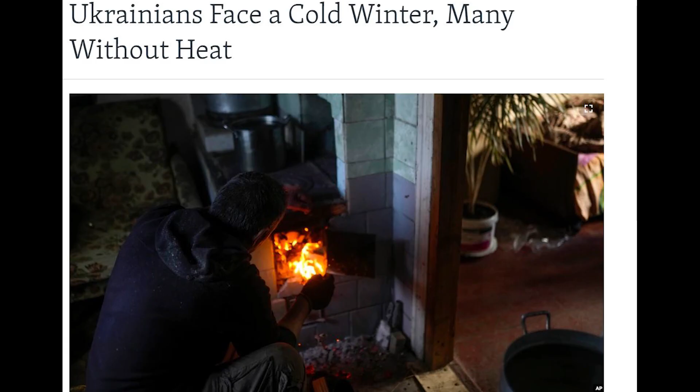Europe has a massive problem right now, and the problem isn't limited just to this massive plebeian right here. The problem is also this. Between Russia's war with Ukraine, somebody sabotaging Nord Stream, economic sanctions to Russia, and Russia cucking Europe by cutting off energy and gas exports, 2021 seems like a holiday in the Caribbean with Emma Watson for a stepsister compared to

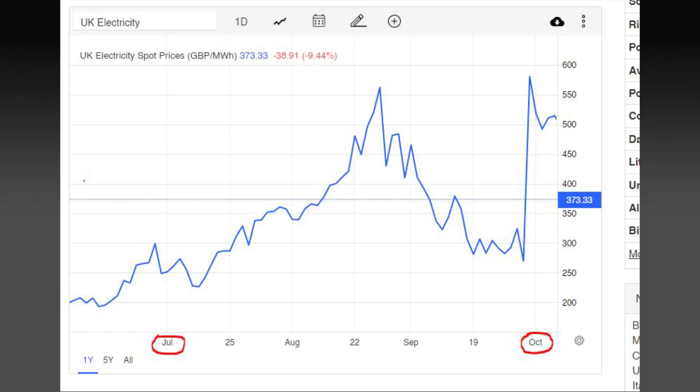2022. And during this year of tripling energy prices, Germany decides to close its nuclear power plants, which is a move so stupid even the green girl herself dissed them for doing so. As a matter of fact, why don't we start building more nuclear power stations?

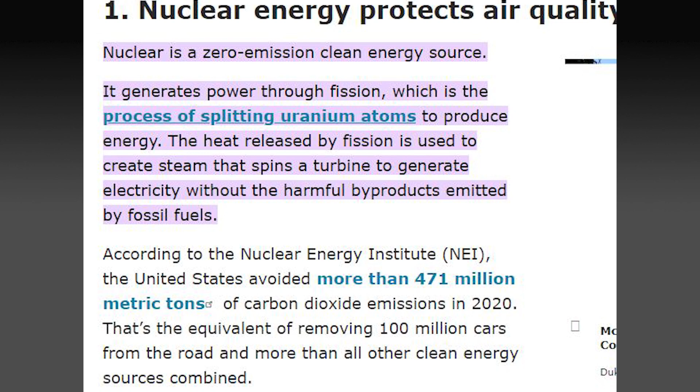Of course, it is somewhat problematic to start up since nuclear power stations are expensive, take up quite a lot of space, and present a lot of technological challenges. But in exchange we get clean, reliable, relatively low-cost energy for very, very long periods of time. Nuclear power plants operate for decades on end, and over their lifetime produce so much energy it's actually almost absurd.

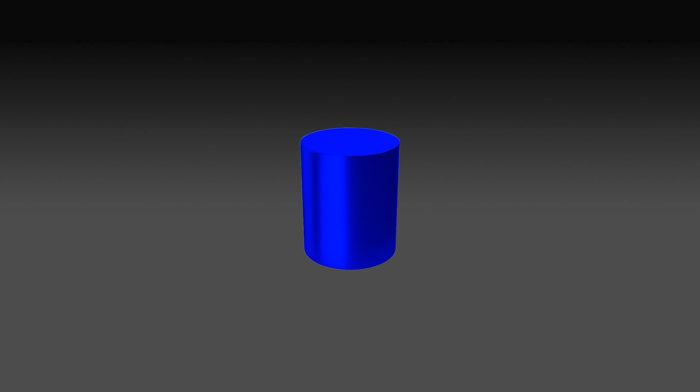While stuff like coal has energy density of around 24 megajoules per kilogram of material, uranium-235 has 3.9 million megajoules per kilogram. A single standard 20-gram fuel pellet contains about as much energy as around 1,600 kilograms of coal, 1,120 liters of oil, or 960 cubic meters of natural gas.

And as an additional bonus, uranium is pretty common on Earth, to the point of being considered a sustainable energy source. So why isn't nuclear energy hailed as the holy grail of energy production and used everywhere and by everyone? Well, one possible answer is that while nuclear energy is the safest kind of energy, when it goes wrong, it goes really, really wrong. Places like Chernobyl and Fukushima are the most famous examples of this, with both areas experiencing nuclear catastrophes and as a result of that becoming hazardous areas for any kind of life for decades.

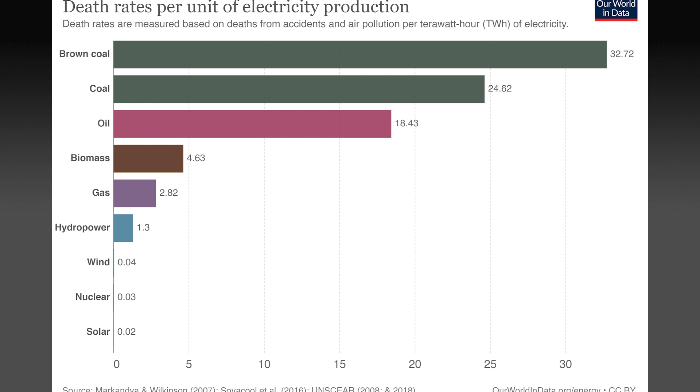But even considering all the nuclear power plant incidents, of which there have been over 100 since 1952, nuclear energy is still by a huge margin the safest kind of power, both to the environment and to life. Chernobyl in 1986, Fukushima in 2011, Kyshtym in Soviet Union in 1957, First Chalk River incident in Canada in 1952, Three Mile Island in USA in 1979, and Goiânia accident in Brazil in 1987 are the biggest nuclear accidents ever, and even combined with all other nuclear incidents,

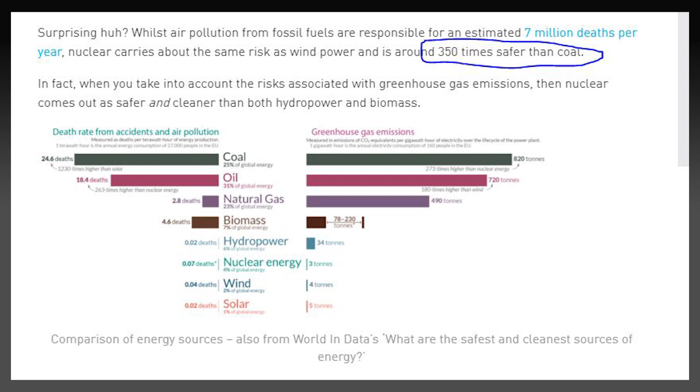and considering all the damage that came from those incidents, nuclear power is still about 350 times safer than coal power, and is basically as safe as solar power. And combined with the fact it's thousands of times more efficient than solar, or any renewable energy source for that matter, it makes nuclear energy seem like a no-brainer when it comes to the absolutely best kind of energy generation across the planet.

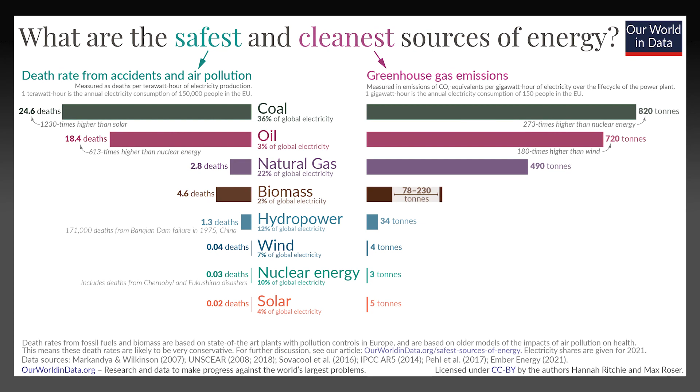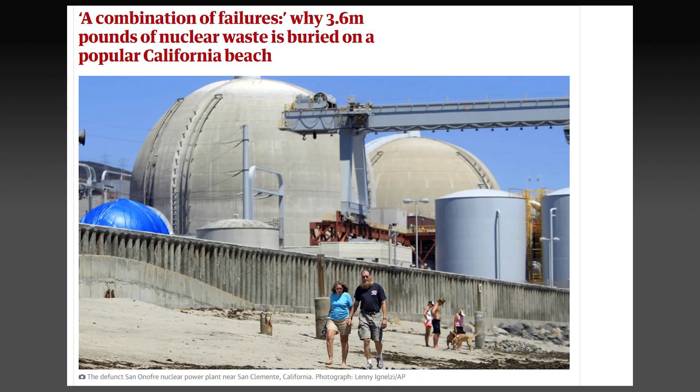Well, aside from safety, the biggest thorn in the side of nuclear energy might be the nuclear waste. The NIMBY, or not in my backyard mindset, is very prevalent in people who know the least about nuclear energy but shout the loudest, and it is a major reason for the gigantic pushback against nuclear energy. It's not helped by the fact that the absolute majority of government solutions to the nuclear waste problem up to this point were nothing less than idiotic and ineffective.

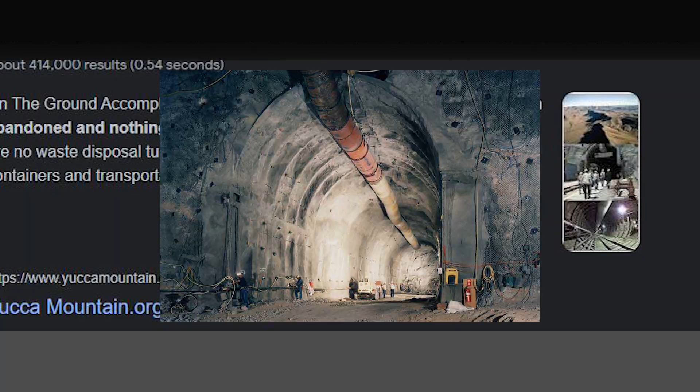During nuclear reaction, uranium is used up to produce heat and some byproducts. These products mostly consist of cesium-137 and strontium-90, along with some other elements like plutonium. And it's these products that are most dangerous and problematic to store long-term, since they remain radioactive for centuries. In addition to that, they also generate quite a lot of heat for decades. So, how do we store this waste?

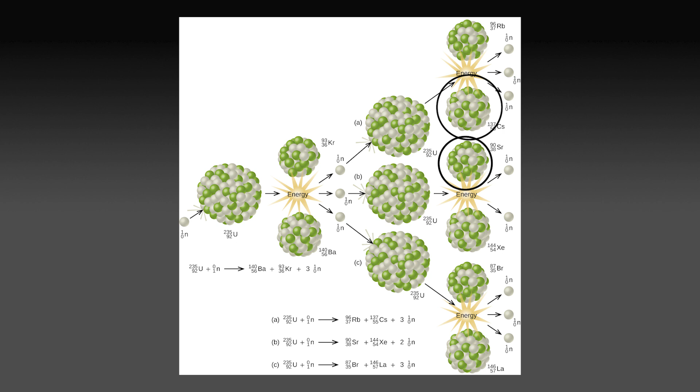The main challenge to long-term storage is placing it in a safe area with no people nearby, safety from people gaining access to it for whatever reason, and future-proofing so it stays secure for centuries. That means the only real storage sites are deep burial sites, like deep abandoned mining shafts, purpose-built underground vaults, or,

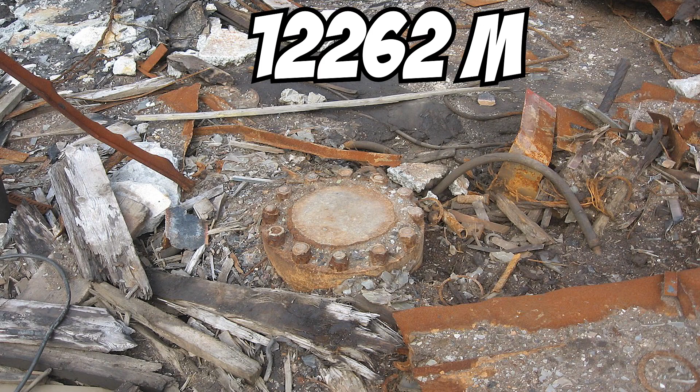in this particular case, super-deep boreholes, like one of the deepest boreholes ever, Kola Superdeep Borehole on Kola Peninsula, near the Russian border with Norway, started in 1970. Over the next 25 years, Russians drilled to the depth of 12,262 meters, making it the deepest artificial point on the planet until 2008, when a deeper borehole was drilled on the Arabian Peninsula.

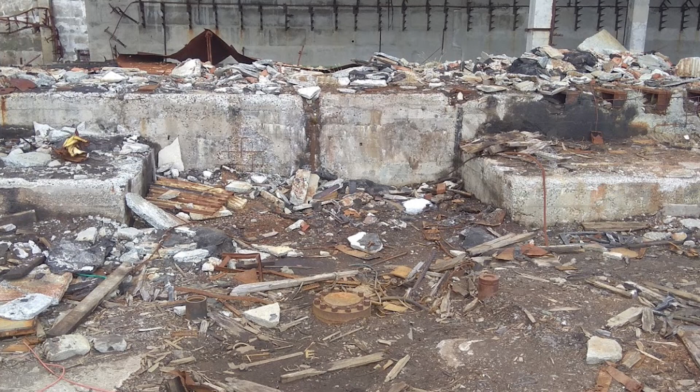In 2008, the company that was responsible for the borehole was liquidated, and the borehole was completely abandoned. Now it serves mostly as a remote tourist attraction and barely anything else. The depth and, more importantly, the remote site of the borehole make this basically an ideal place for a long-term nuclear storage site. There's already an access road to the borehole site, and the closest somewhat populated area is Zapolyarny, a small town northeast of the borehole.

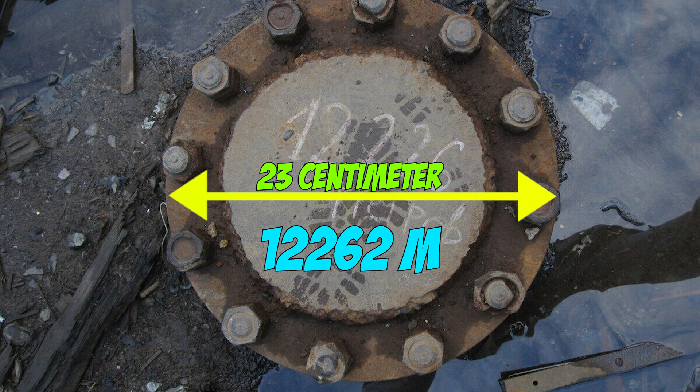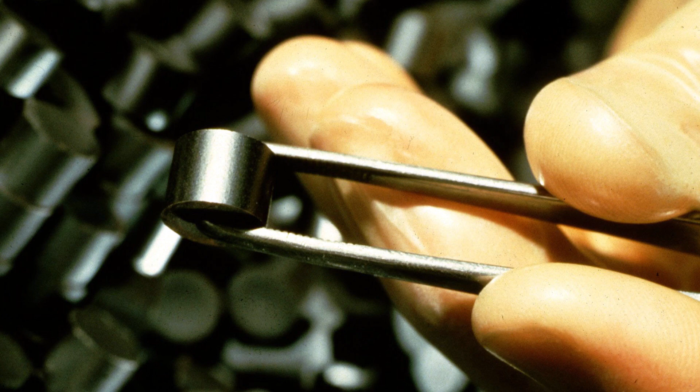The borehole itself is about 23 centimeters wide, 12,262 meters deep, and it gets hot at the bottom, at around 180 degrees Celsius. It might seem like a pretty high temperature, but it's not too much of an issue, especially when nuclear processes are involved. In nuclear reactors, nuclear fuel is used in the form of nuclear fuel pellets. An average nuclear uranium fuel pellet is about 12 millimeters wide, 20 millimeters tall, and weighs about 20 grams.

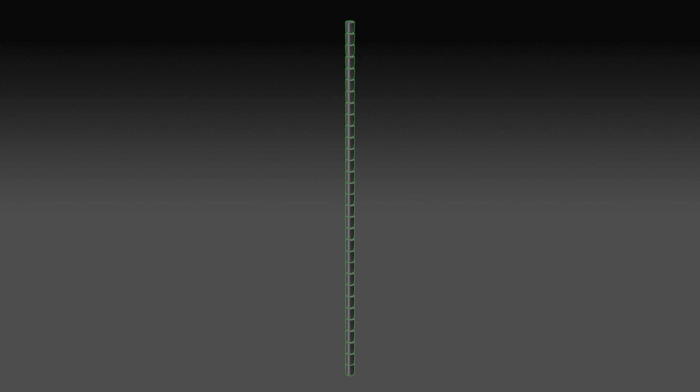In reactors, nuclear pellets are used in the form of nuclear rods, sometimes also called nuclear tubes. Every nuclear tube consists of nuclear fuel pellets stacked on top of each other in a metallic alloy tube that is sealed from both ends. An average rod is about 14 millimeters wide, accounting for the width of the fuel pellet and the alloy tube wall. Each fuel rod is roughly 4 meters long.

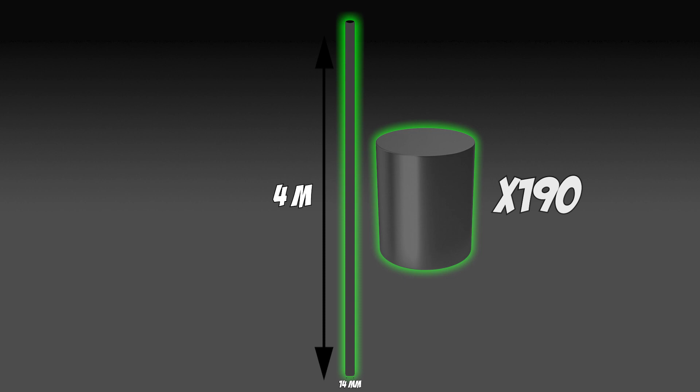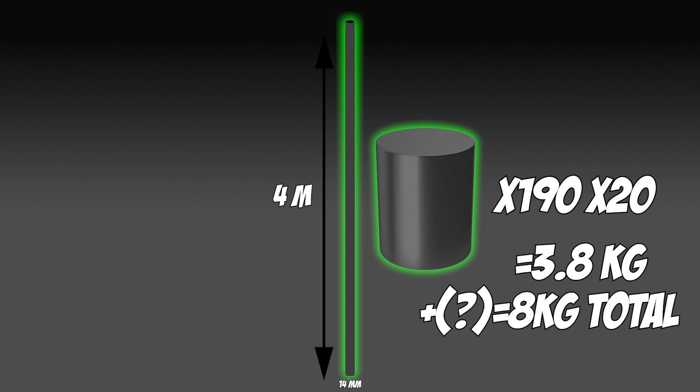And keeping in mind every rod is capped at both ends with some material, it means every rod is made out of about 190 nuclear fuel pellets, and with the weight of around 20 grams each pellet, every rod has a mass of around 3.8 kilograms of pure uranium, plus whatever the weight of the tube wall itself is. Let's assume it to be 8 kilograms, just to be generous. Keep in mind, rod and pellet dimensions differ depending on what reactor they are used for, but these are the average dimensions I've found on the internet.

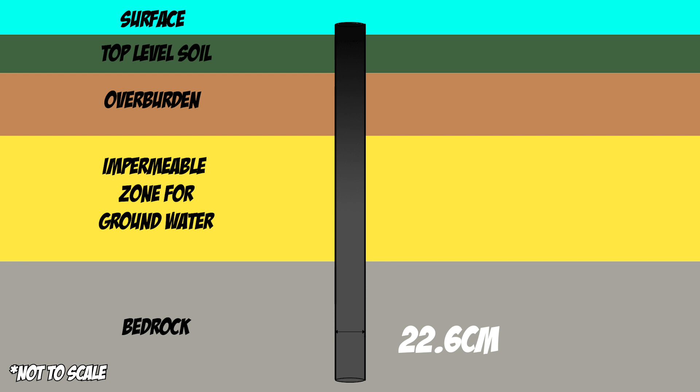We know the diameter of the actual borehole is about 9 inches, or roughly 23 centimeters. It's not an exact value, and in some places the borehole may be narrower or wider, but that's an average. Let's just say the borehole is 22.6 centimeters wide, just to be safe and have a consistent number to work with. We also need to make sure the radioactive fuel rods don't directly touch the walls or they may be damaged, and we should also probably block some radiation from the rods from irradiating surrounding soil, but only to a point. Mostly we only need to block radiation close to the surface, as at deeper levels radiation will be naturally blocked by surrounding soil. So to make it simpler, let's add 2 centimeters of insulation material around the nuclear rods for radiation blocking.

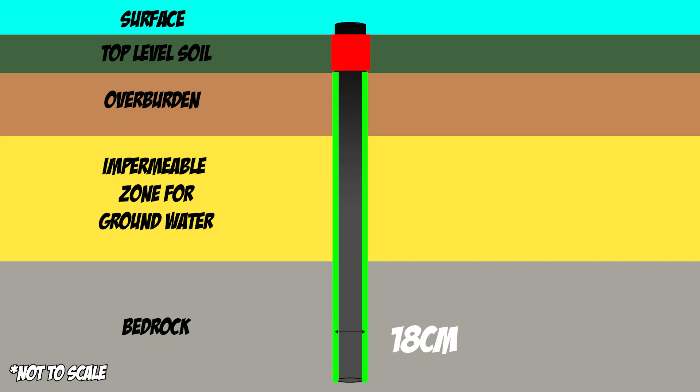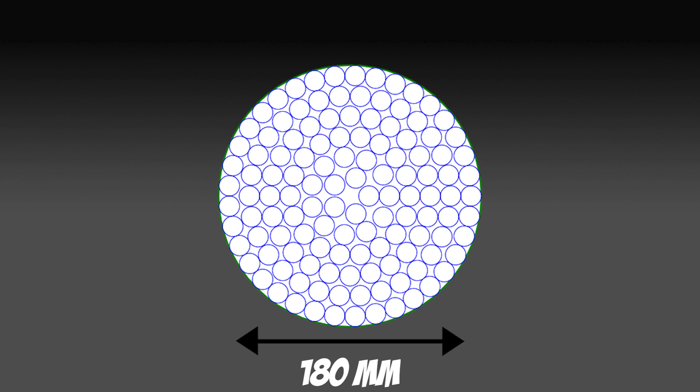Since the borehole is 22.6 centimeters wide and 4 centimeters total are used for insulation, that leaves us with 18.6 centimeters of space to work with. We're gonna need some space later, so let's just say we've got 18 centimeters or 180 millimeters of space available for fuel rods. Since we're assuming every rod is 14 millimeters wide to account for the width of both the fuel pellet and the tube wall, we can calculate that in 180 millimeters of space about 125 nuclear fuel rods can fit side by side. The space between rods can be filled with some kind of material, like concrete, resin, or some other material to basically glue the rods into one big unit.

Also, let's add 5 centimeters of padding on top of each unit so that units wouldn't stack directly on top of each other and rods wouldn't touch, and keeping in mind the 2 centimeter padding along the circumference to block radiation from irradiating surrounding soil makes the final dimensions of a unit 405 centimeters tall, 22 centimeters wide, each containing 125 fuel rods and weighing 1,475 kilograms. It is kind of heavy, but I have a strong feeling we've severely overestimated the weight of the nuclear tube itself, but that's what we'll work with. Besides, the insulation around the waste unit also weighs something, so 1,475 kilograms per waste unit is probably somewhat fair.

The total depth of the borehole is 12,262 meters, but not all of that is going to be filled with nuclear waste.

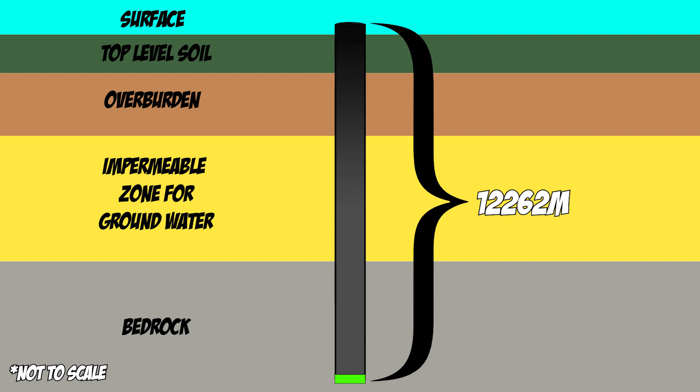There needs to be some kind of padding at the bottom of the borehole so nuclear waste units would have something to stand on and wouldn't sink deeper into the soil, so we need something like a rebar reinforced concrete pillar. So let's subtract 10 meters from total depth of the borehole, giving us 12,252 meters of hole to work with.

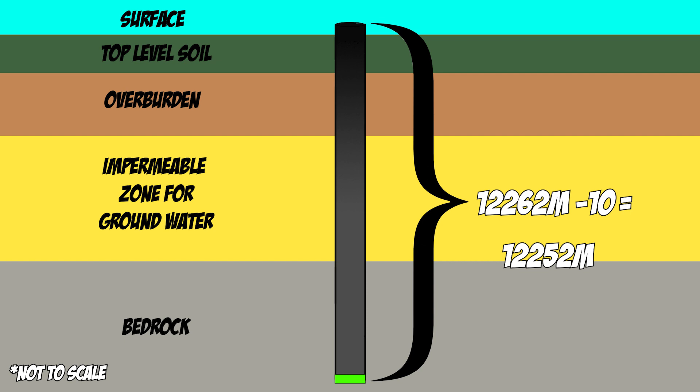At this point a question arises: how do we lower something so heavy so deep without damaging it or the borehole itself? The obvious first choice is something like a crane, and since we need to lower something quite heavy quite deep, the crane would have to be really big.

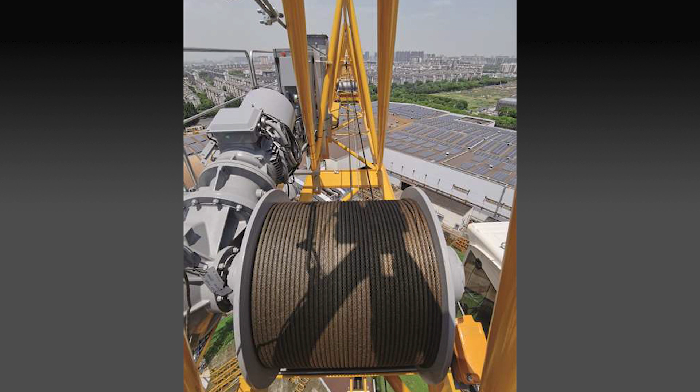The problem is not only the weight of the waste capsule itself, but the length of the cable required to reach such depths. Not just finding a suitable crane would be difficult, but producing a rope long enough to reach the bottom and support its own weight would also be extremely difficult, since even the longest regularly used hoist cables are nowhere near strong enough and long enough for such depths.

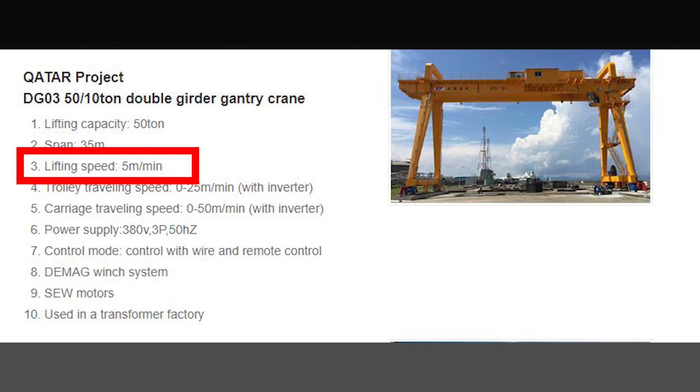But even if such a crane and cable could be obtained, the problem is speed. Cranes are typically pretty slow when it comes to lifting stuff, especially lifting something as heavy as the cable required to reach the bottom of such a borehole. We're talking about potentially thousands of tons in just cable.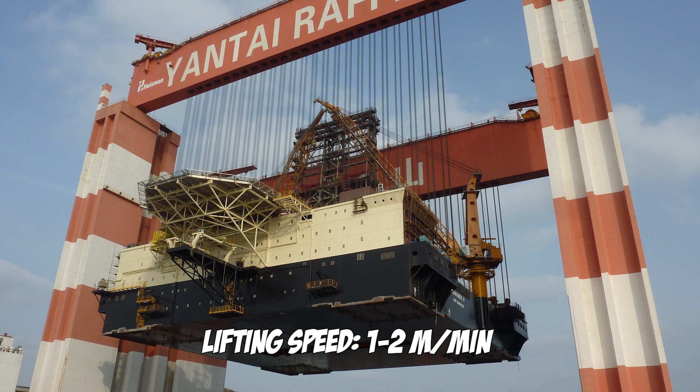Some of the biggest cranes in the world can only lift super heavy weights at very low speeds, 1 to 2 meters per minute or so. At such speeds, just lifting the cable from the hole would take about 90 hours every single time.

And that's not counting the time required to actually lower such weights into the borehole in the first place, including both lowering the waste unit and lifting the cable back up, as well as actually fitting the unit onto the cable and various other necessary operations. It's quite possible depositing just one nuclear waste unit into the borehole could take several days per unit lowered.

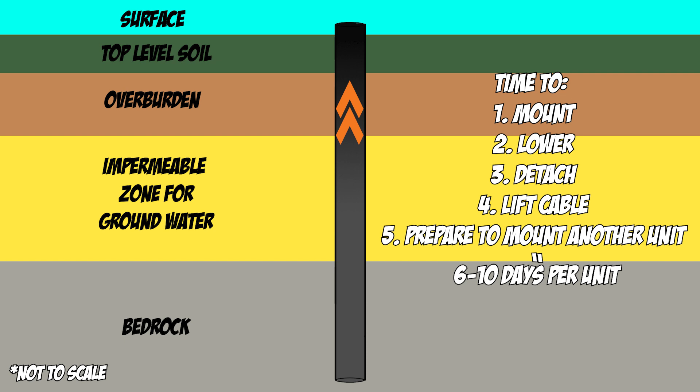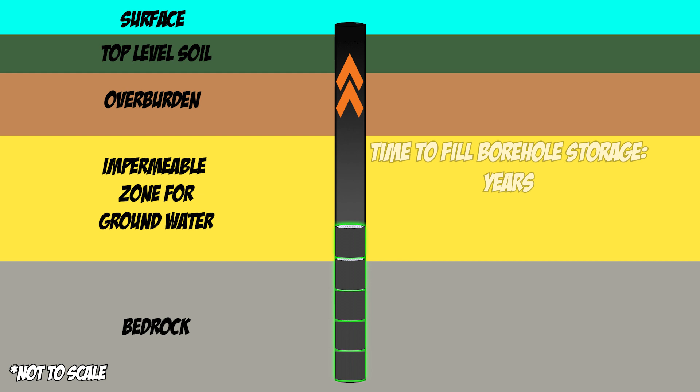Of course, it would get faster and faster, as waste units stacking on top of each other would mean each consecutive unit would have to be lowered less and less, but still it would take months to deposit any considerable amount of waste, and potentially years to fill the capacity of just one such borehole, not to mention all the energy required to run such a massive operation.

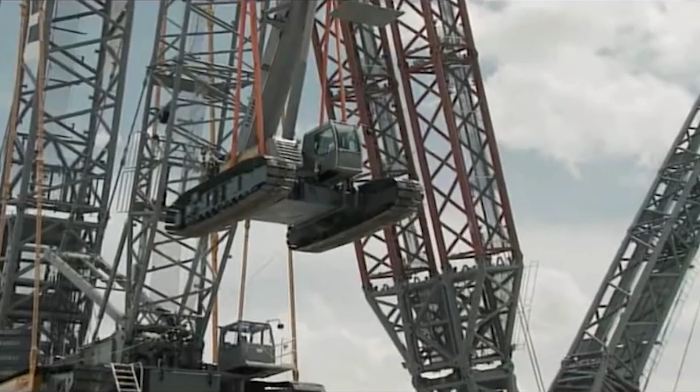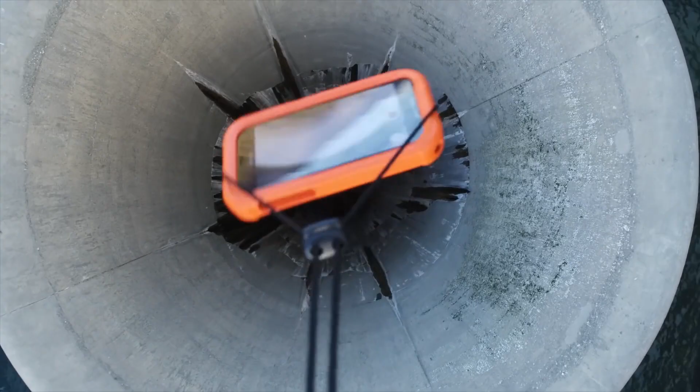So a crane might not be the best answer we've got, but what else is there? Well, there's gravity. Obviously, we can't just simply drop nuclear waste into the borehole and call it a day. But we can drop nuclear waste into a borehole in a controlled manner and call it a day.

Since we calculated the width of the borehole to be 226 millimeters and our waste units are 220 millimeters wide, that leaves us 6 millimeters of space. That 6 millimeter gap is for air. The borehole isn't actually empty, it's full of air. And this is what happens when you drop something into a tube full of air.

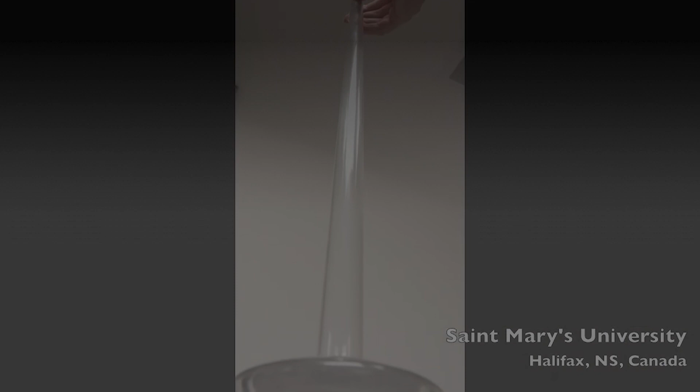Basically, if air has nowhere to go, it gets compressed, and its density rises the more compressed it gets. In this case, air acts more like a liquid than a gas, and anything moving through liquid experiences certain resistance. The more dense the air gets, the more resistance it puts up against anything moving through it.

Even if such a heavy load as our waste unit was dropped into a tube of air, it will accelerate to high speed at first, but because of how small the gap is for the air to move out of the way of the waste unit, the air below will get more and more compressed, gradually slowing down the movement of the waste unit. Of course, at a certain level of compression, the air will get too compressed for our waste unit to continue moving through it.

At which point the waste unit will probably bounce off. But then it will fall and compress the air again. The high mass of the waste unit will increase the compression of air while also damping the bounce, which means it won't actually bounce as high as something lighter. And every time it bounces, the waste unit will bounce lower and lower. Eventually, it will stop bouncing completely and just slowly move through now constantly compressed air at a low rate of speed.

That 6 millimeter gap between the waste unit and the wall of the borehole is where the air will flow around the unit, but because the gap is relatively small for the volume of air inside the tube, the waste unit will constantly encounter air resistance all the way until it reaches the bottom.

At the very bottom of the borehole, the waste unit will likely be moving very slowly, so the air has time to move out of its way, meaning the touchdown of the waste unit onto the concrete pillar at the very bottom will be slow and relatively gentle.

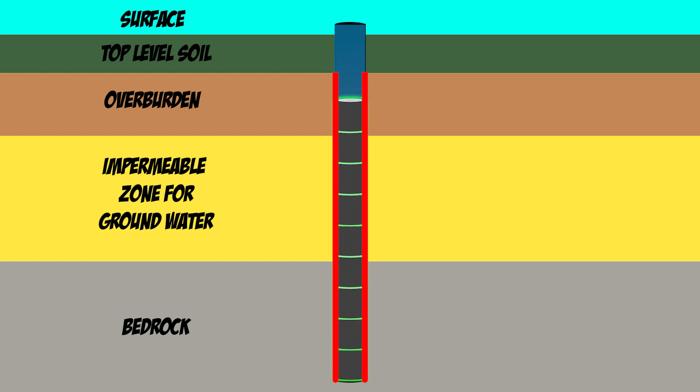However, this is an easily solvable problem since we can actually control both the descent speed and descent time of the waste unit by changing the width of the air gap between the waste unit and the wall.

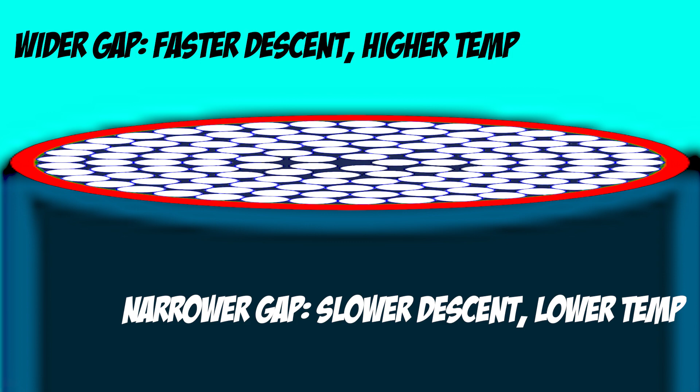If the waste unit was falling slower, the air wouldn't get compressed as much and would have more time to flow out of the way of the unit, so the temperature would also rise at lower rates and to a lower maximum level. If the gap was barely there at all, maybe like a millimeter or so, it could potentially take days to reach the bottom.

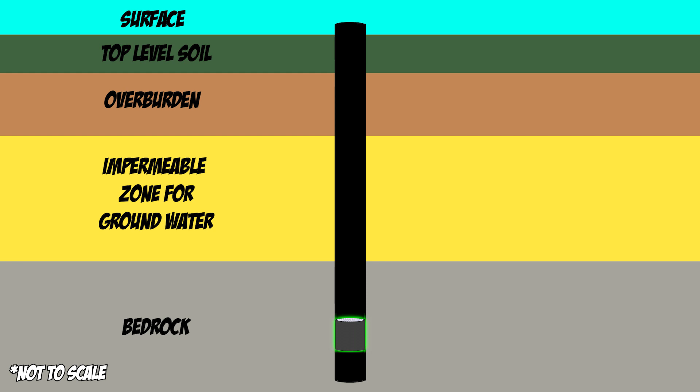But the waste unit would move very gently and such a descent would require no specialized equipment or external energy input. After a point, however, the volume of air in the borehole would become too low for it to compress enough to provide enough resistance to slow down waste units enough.

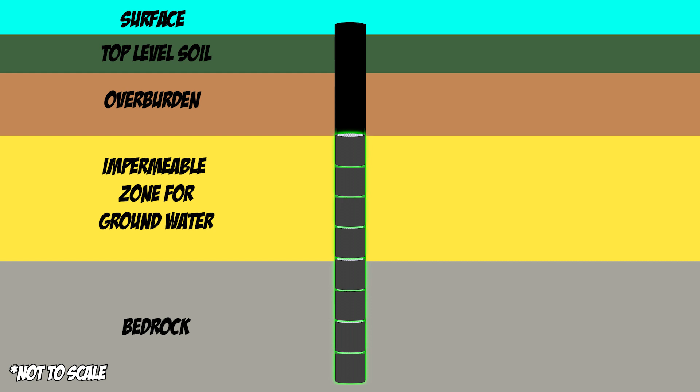But considering the total amount of air in the borehole, it would probably be relatively close to the surface, at which point waste units could be easily lowered using conventional cranes. We also must account for the insulation at the top of the borehole.

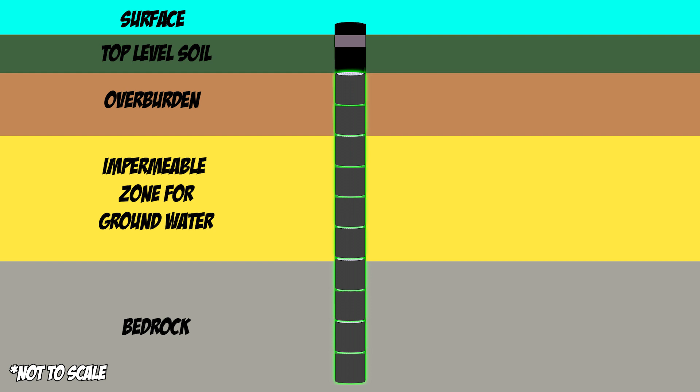Once it's filled in with waste units, we want to cap it off a decent distance from the actual surface, both to protect it from whoever might try to reach it and to block the radiation from going up the borehole. To block all possible radiation, we need several feet of concrete.

I couldn't find the exact number in metric, so I'm going to assume we need roughly 150 centimeters of concrete to block off all incoming radiation, and that's for regular, everyday, normal concrete. There are various designer concretes that are way better at radiation blocking, but data for those types is pretty hard to find, so let's just use regular concrete. Anyway, 150 centimeters of concrete is enough for radiation protection.

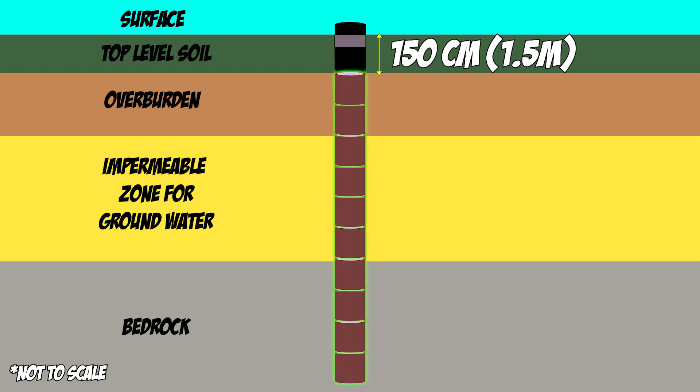But we also want to protect the nuclear fuel from being accessed by unauthorized personnel for whatever reason. We might also want to build something on top of the borehole site, since the top layer of boreholes is still usable land, so buildings or structures might be built on top of the boreholes.

So let's just fill the top 100 meters of the borehole with concrete. It will not only block the radiation, but could partially act as a support pillar for certain buildings, since it will effectively be a concrete pillar going 100 meters down into the soil in a very stable position.

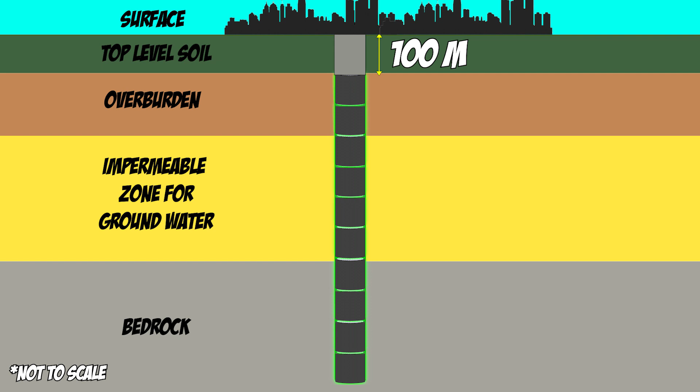So after all that, the final depth of the borehole available for use is 12,152 meters, with the nuclear fuel units each measuring 405 centimeters, or 4.05 meters tall. We could fit pretty much exactly 3,000 units into the borehole.

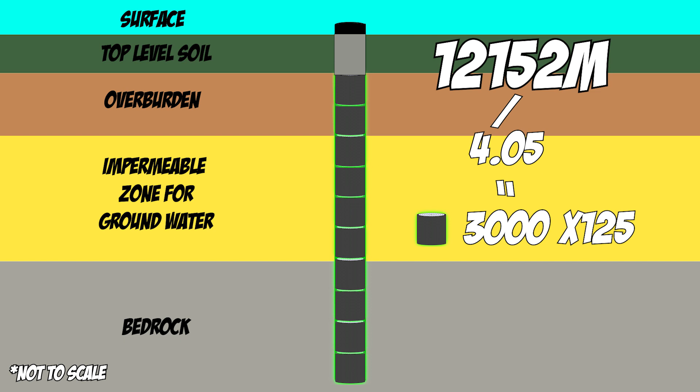That means 375,000 nuclear fuel rods, or 71,250,000 nuclear fuel pellets. The total weight of this entire mass would be 4,425,000 kilograms, or 4,425 tons.

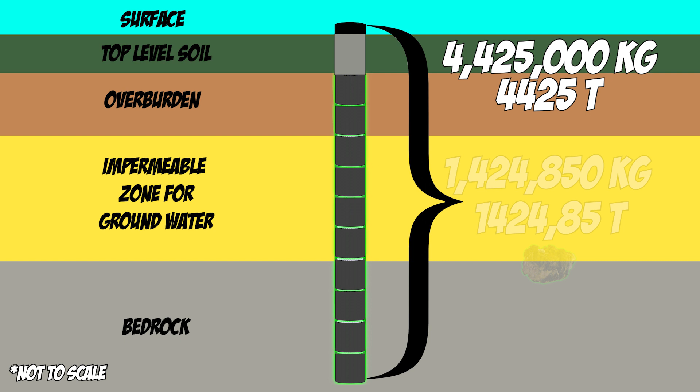Total nuclear waste mass would be 1,424.85 tons, or 1,424,850 kilograms. The other 3,000 tons of material would be stuff like insulation and padding of waste units.

It's actually very hard to find data on how much actual nuclear waste there is on the planet at the moment, but according to this article from the World Nuclear Association, a total of 392,000 tons of high-level nuclear waste has been produced since the first nuclear power plants began operation.

We can round that up to 400,000 tons, out of which nearly 130,000 tons was reprocessed, meaning there's still 270,000 tons of the bad stuff left, which effectively means just the Kola Superdeep borehole alone can account for almost 0.52% of the entire world's unprocessed high-level waste.

Now, this might not seem like much, but there are several points we should consider. First of all, Kola borehole is not the only borehole out there. There are many boreholes in regions like USA and Asia, and even Russia itself has many more superdeep boreholes. Secondly, borehole storage is relatively cheap.

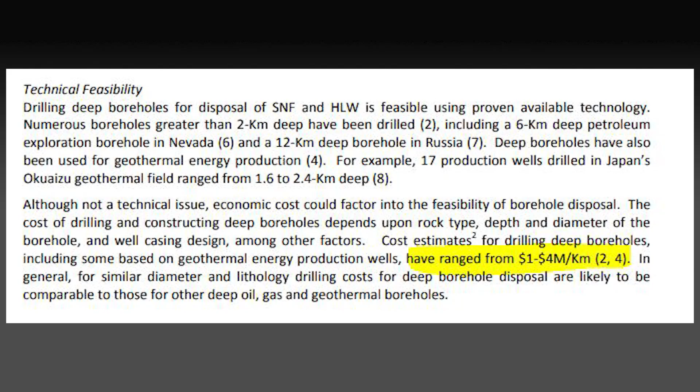Even drilling, transportation of material to and from borehole site, and filling the borehole with material is many times cheaper than building dedicated nuclear waste storage sites. It's hard to find exact data, but in 2016, U.S. Department of Energy funded $35 million to drill around a 5-kilometer deep borehole in Rugby, North Dakota. Of course, it doesn't cost just to drill down, but there's also other expenses, such as wages, transportation of material and people to and from the bore site. And in case of nuclear waste disposal, various expenses relating to that, like proper insulation of site, specialized equipment to handle radioactive material, etc.

Let's just say it costs about $120 million in today's money to drill a 5-kilometer deep borehole. Of course, the deeper you dig, the harder it is, so let's double that and add 25% for a super deep 12-kilometer deep borehole. In total, it would cost around $300 million to dig such a hole, and $300 million is basically pocket change, especially considering how much money has already been spent on ineffective solutions.

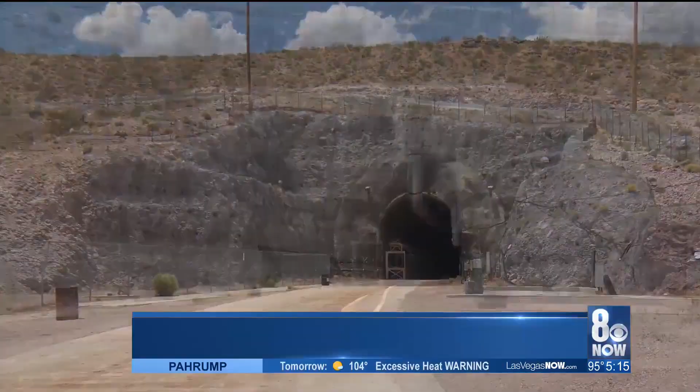For example, Yucca Mountain Nuclear Waste Repository within Yucca Mountain in Nevada has already cost around $13.5 billion over decades of construction, delays, and various issues, and not a single gram of nuclear waste has been stored within the facility yet. The total projected cost of the Yucca Mountain facility is about $100 billion.

For that much money, we could drill about 330 super deep Kola-like boreholes. And just 194 such boreholes would be enough to store literally all the high-level nuclear waste ever produced up to this point in history. 330 boreholes would be enough to contain all high-level nuclear waste ever produced, and even an extremely large amount of medium and low-level nuclear waste. Or we could store all high-level waste up to this point and additionally store all high-level waste we'll produce in the next 50 years or so.

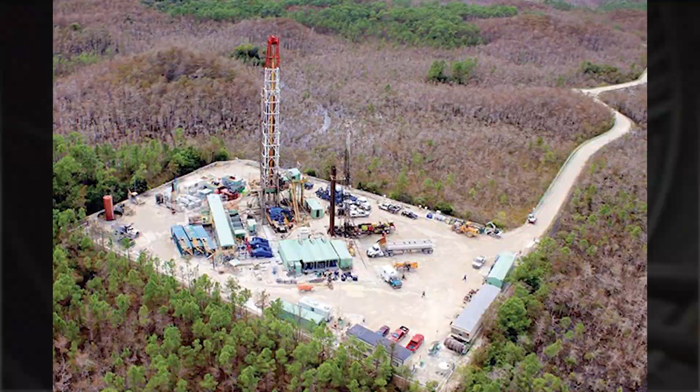Of course, drilling a borehole takes a long time and requires a lot of effort, but borehole drilling operations are somewhat small and relatively compact, especially compared to mega projects like Yucca Mountain. And Yucca Mountain is just one of the proposed nuclear waste storage facilities. Across the entire planet, there have been trillions of dollars spent on various projects, and so far very few ideas have turned into actual solutions.

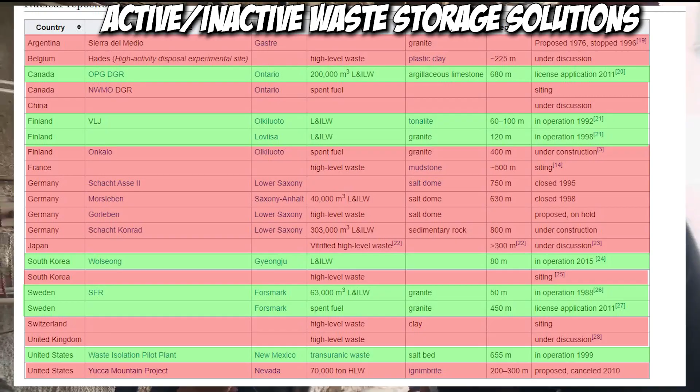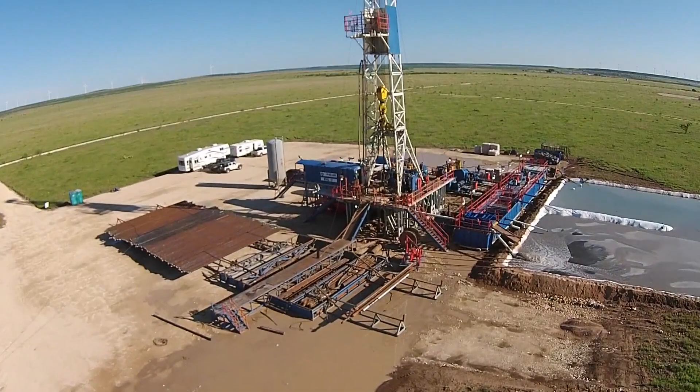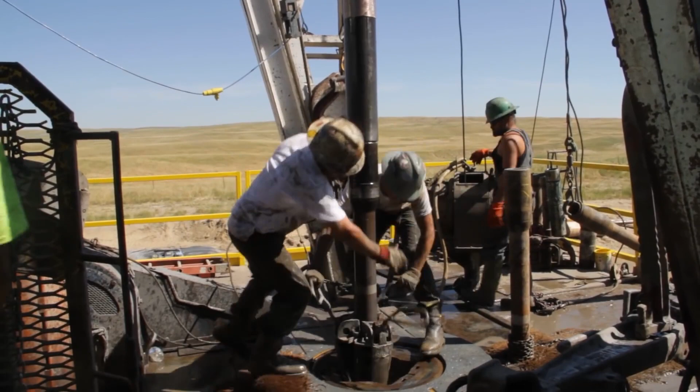Besides, with how relatively compact and eco-friendly borehole projects are, it would be very possible to have multiple groups drilling boreholes in various locations at the same time across the globe. And considering that we can safely build structures on top of said boreholes, they don't even have to be in such remote sites as Kola. They could be located at sites close to the nuclear power plants or in areas reserved for future development. That would considerably decrease the transportation costs of people and equipment, and since these projects would probably take considerable time to implement, probably a few years at least from planning stages to capping off the boreholes, they could create long-term work opportunities and boost the local economy.

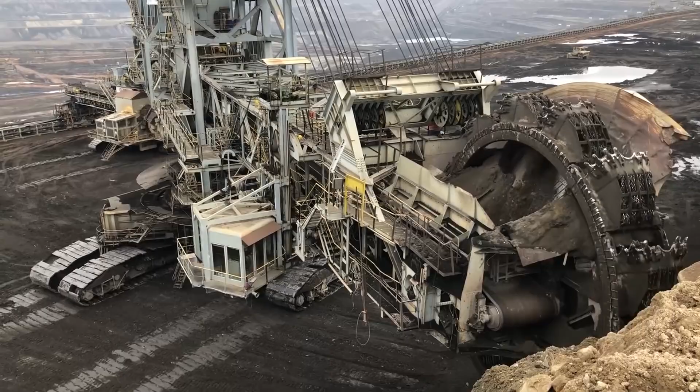In general, it's considered that boreholes would be pretty much the fastest and basically the best way to set up nuclear waste disposal. As the third point, deep borehole disposal is actually the least environmentally hazardous type of storage. According to Wikipedia, a waste handling facility plus temporary security buffer zone only requires about 1 square kilometer of space, and after the nuclear waste is sealed, the facility can be dismantled and the environment can be returned to pretty much pristine condition. Using boreholes as a storage solution is even less environmentally impactful than just mining coal and other fossil fuels, let alone transportation, refining, and then burning non-renewable fuels in power plants.

So yeah, we should start drilling more holes into the ground and burying our nuclear waste in them. But what do you think?